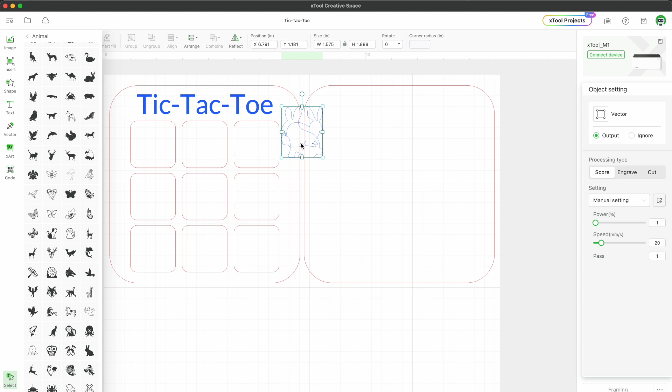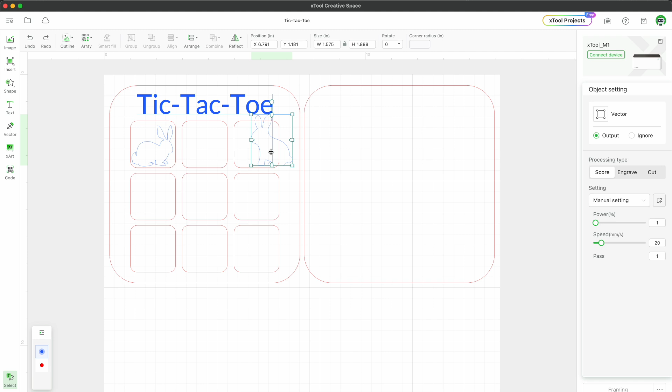So what I'm gonna do is take each one of these bunnies and size them so that they fit within the square. This bunny right here seems to already fit in there just fine, so I'm just gonna keep it that size. And then for this one, it looks like it's a little big, so I'm gonna shrink it down and just see if it fits in there. To me that looks good, and that looks like enough room left so that the pieces can be grabbed out of the square spaces.

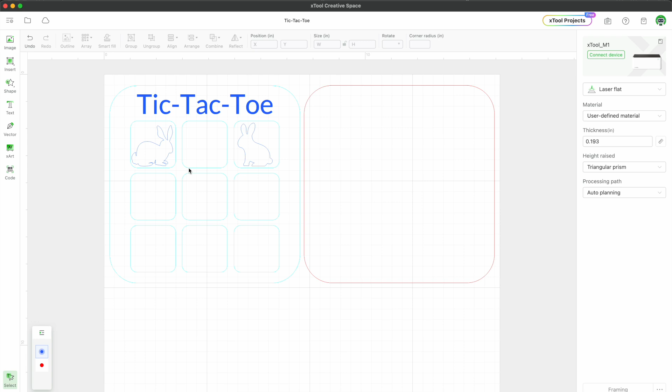So what I'm going to do now is make these green, and make these be cutouts. I'm going to take both of these down here. Green, green. Okay, so then I'm going to want these to be set to cut.

And this one's set to cut. And then for the tic-tac-toe, that's blue, and I have this one set to engrave. So this is going to engrave on whatever material. You could do this on acrylic or wood. I think I might try both so that we have two sets.

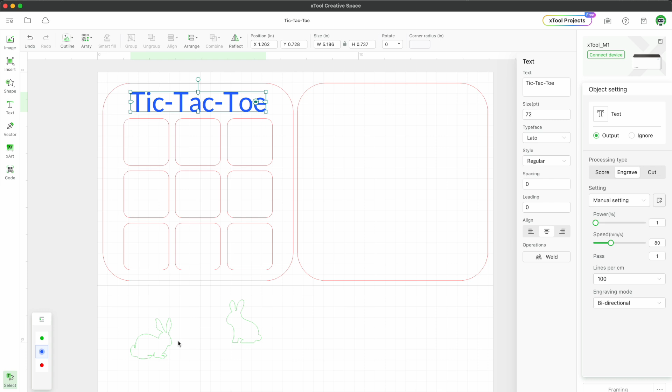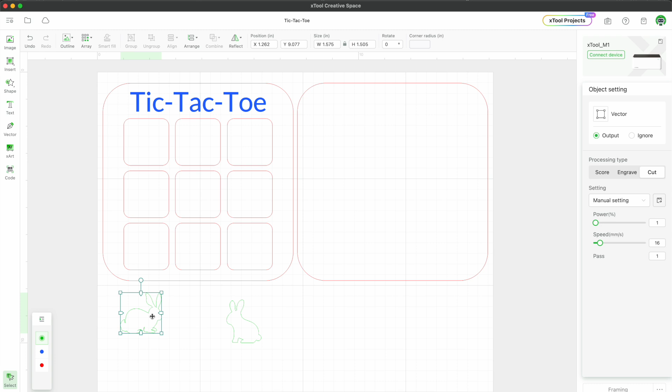So we'll do that. And then on the bunnies, I think I might add like hearts to them so that they can have some engraving on them as well, or I could just leave them like this. And then my board is set to cut. Make sure when you have your bunnies that you make copies of them. I'm going to make 5 of each, so I'm going to do copy, paste, paste.

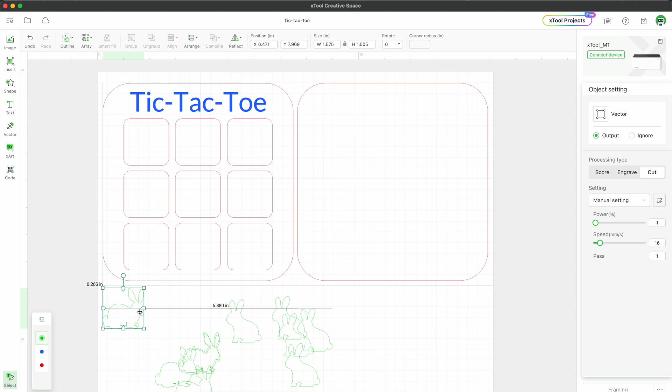So basically what you want to do is, based off of the sizing of everything, make sure that whatever material you're using, you can cut it out on that one piece all on one, or cut each one individually. So if you have smaller pieces you're working with, you can cut these one at a time. You just ignore each piece - say ignore this piece and ignore all the bunnies, and I'm just going to cut this one right here out. Then if you have another smaller piece, you cut this out, and then if you can fit all the bunnies on whatever piece.

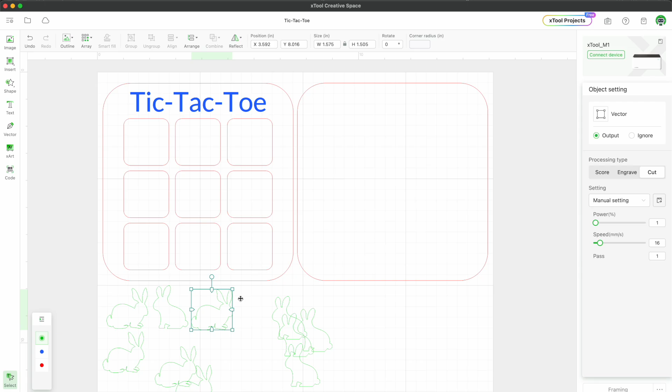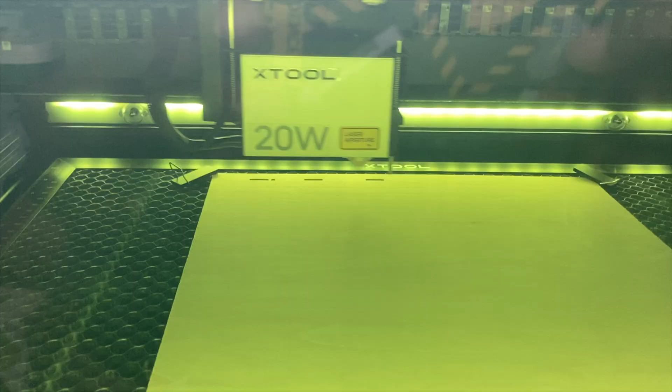And then I just wanted to show you guys real quick, I'm going to be cutting this out on some 3mm basswood. And then I'm gonna hit start. So I forgot to tell you guys, it's a little bit loud, so hopefully you can hear me.

I put it to do the engraving of the tic-tac-toe first. Then it will cut out the top piece of the board, and then it's going to do all the little rabbits below. And then I'll put another piece on to do the backing. So about 5 minutes - it is almost done cutting out the top piece of the board.

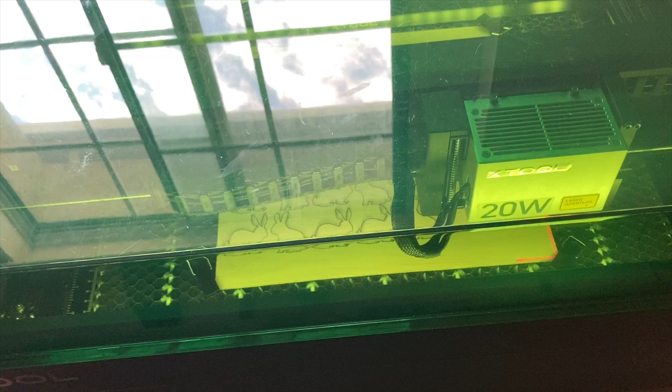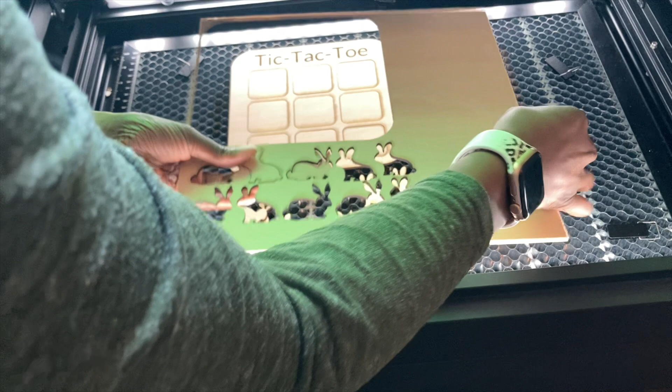Alright, so about 10 minutes later it's done. This is how it looks for the top part. So everything cut out with just the settings of the basswood 3mm plywood that was used. I didn't do anything else, but I just used what was already set in the xTool.

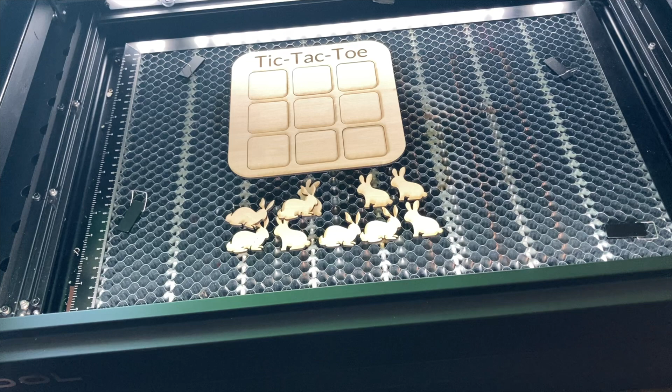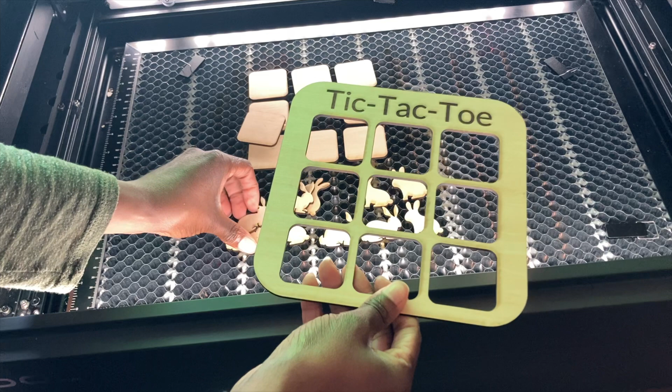Alright, so the bunnies are all out, and this top layer is out. Okay, so let's move on to do the bottom layer, and then I'll show you guys the finished product.

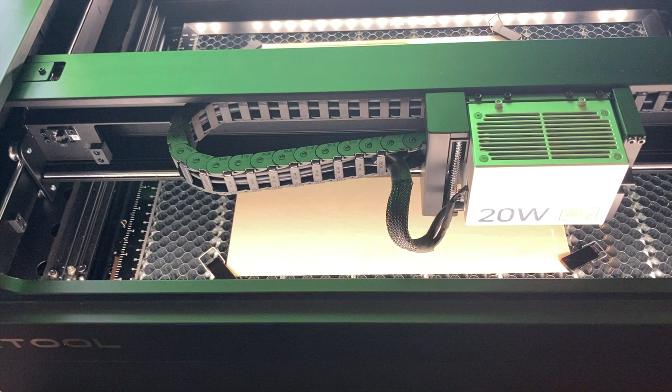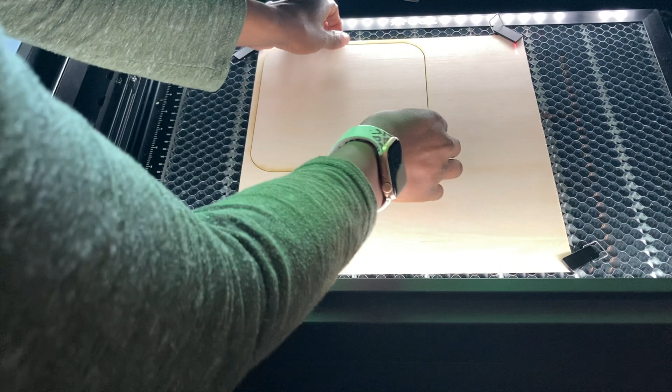Okay, so this part's done. I didn't want you guys to have to sit through me doing the setup process again. This took 1 minute and 20 seconds just to cut out the backing. I did the same thing I did the other one - made sure I did the distance and marked the material, and then I just changed it from ignore to output, and it was able to cut this out.

So it looks like it didn't go all the way through in some places, but I'm going to see if I can just get it out of here. Alright, so I was able to get it out. Of course it didn't cut all the way through in some places, so I can maybe do 2 passes, or maybe it's just that the wood was not the same composition - sometimes they're just not exactly alike. But anyways, I got the backing out.

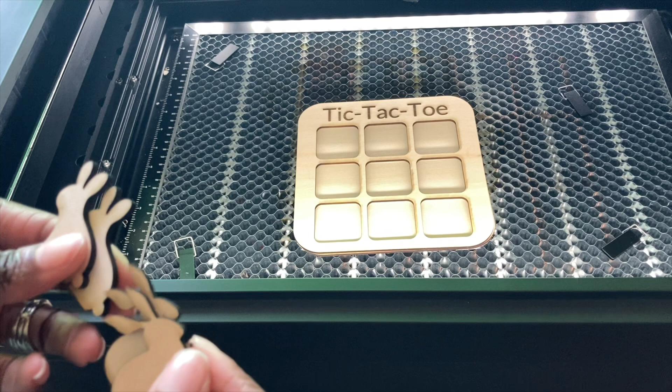So all you have to do is, if you want to add some color, you can color this back part, and then glue this top part to it, and paint this as well. Let me grab one of each of the bunnies so you guys can see, and then you can play tic-tac-toe. You can color the bunnies in, have your kids design them however you like. I think that would be super cute.